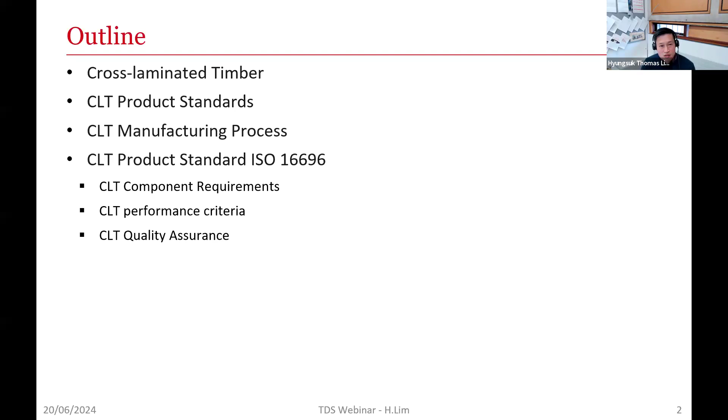So CLT, this is the definition that came from APA, the Engineered Wood Association in the United States. It is a large panel, it's prefabricated. This definition says it consists of several layers of kiln-dried lumber boards stacked in alternating direction, bonded with structural adhesives, and compressed to form a solid straight rectangular panel.

I think that's a bit outdated. I'm sure this definition will be probably updated by APA sooner or later, because today you're going to see that ISO allows the use of non-lumber product. So it's going to be like plywood or wood-based materials pretty much, I mean wood-based panel materials.

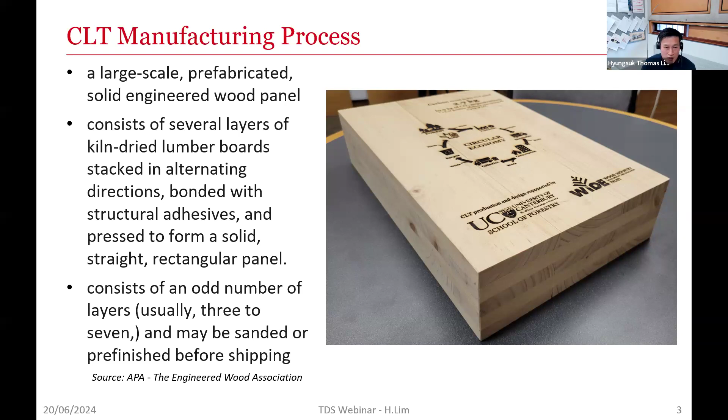So what are the CLT standards out there? Well, ISO 16696 is something some of you guys are familiar with, and ANSI APA PRG 320, that's valid for United States and Canada, but they all say it's a North American standard. And EN 16351, that's a European standard.

And also, even for smaller markets such as Japan and South Korea, they have their own CLT product standard, JAS 3079 and KS F 2081. What do we have in New Zealand? We are not covered specifically by any specific product standard yet. And what about Australia? I believe they are not covered either, but...

So the manufacturers are using ISO 16696 as the overarching product standard, and they're using it in combination with other standards as well. These are not the complete list, but these are the ones being somewhat used the most. ISO, ANSI, and EN are the ones adopted mostly around the world. And you will see why.

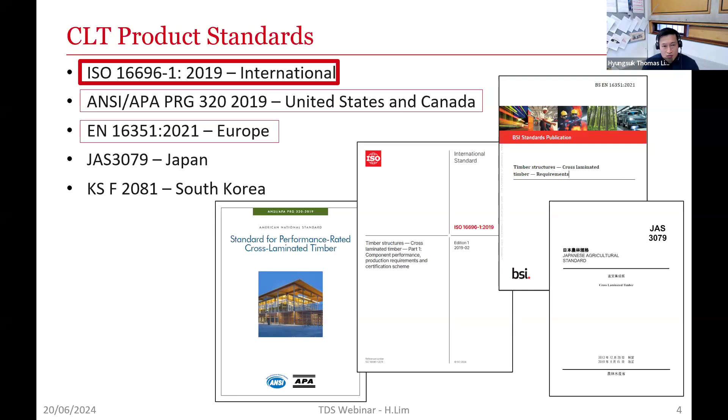Like, let's say, our facility, our manufacturing plant is qualified on ISO 16696. Doesn't that mean our production or our CLT is qualified to be sold in any market? Well, you'll see it's not going to be the case, because it's pretty holistic and very general, but it's not really specific. Okay, so let's start with the CLT manufacturing process.

CLT, this is actually from the CLT handbook. This was first written by FP Innovations in Canada, and they also published a US edition. So you'll see the given condition is lumber, not timber, because in New Zealand we talk about timber, not lumber, right? And it was also made when CLT first entered the North American market.

So you're going to see that they're only discussing how to use dimensional timber, not wood-based panels. Okay, so let's look at the first three processes. One process that's missing is finger jointing here, which I'm going to talk about in a bit. So you can start with the primary lumber selection.

It goes, you have to grade the timber and, say, you confirm, even though you're buying the timber from the sawmill at a grade, you actually grade them again. And then when you buy the timber from sawmill, they are mostly 19%, at least in North America. And you see that when they say kiln dried, it's the average moisture content they're referring to is 19%.

So, but for CLT manufacturing, the recommended MC, moisture content, is 12% plus minus 3%, which means it has to be somewhat redried or conditioned to a lower moisture content when it gets to the CLT manufacturing plant before it gets made up.

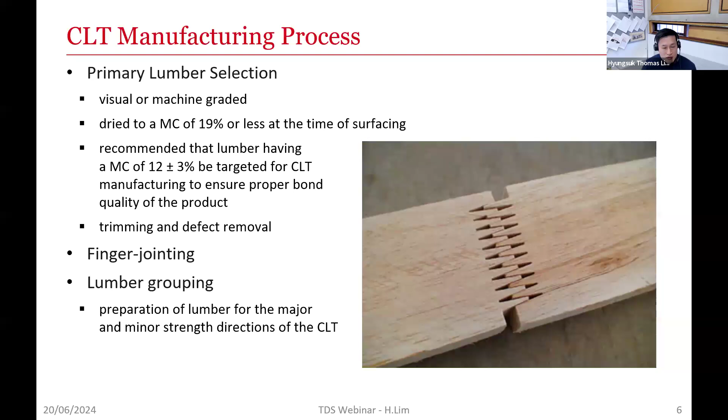Then the lumber gets planed on 4 sides. Why do you have to do that? You have to refresh the wood surface to reduce oxidation for better bonding. The recommended removal is 2.5 millimeters from the thickness and 3.8 millimeters from the width.

So these are the finger jointed timber that's getting planed, and once that's done, they get cut to length, and they go for adhesive application.

Depends on the species, they sometimes put primer too. For example, in the southern United States, they use southern pine as a major species. For that species, if they're using certain glue, they have to go for the primer, which enhances the adhesion between the board and the adhesive system.

The common adhesive types are polyurethane, melamine, and phenolic-based adhesives, along with feed speed. Adhesive applicators and the spread rate are recommended by the manufacturers or the adhesive suppliers. Edge gluing is optional.

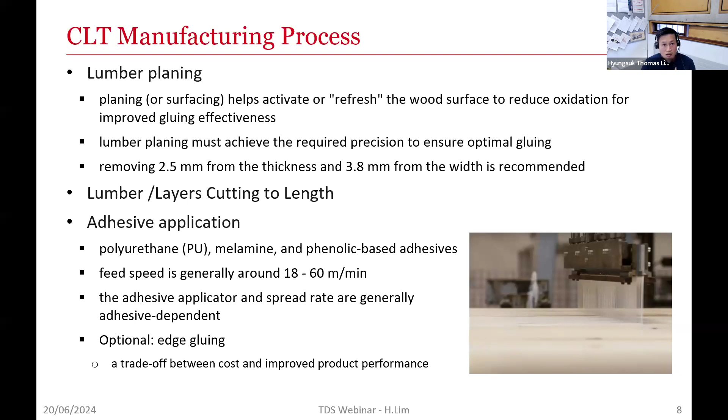So now they're ready, the laminations are ready to be laid up. For today's presentation, I'm going to switch back and forth between the timber and the lamination. Lamination is a piece of timber that goes into CLT. For lay up, adjacent layers are laid up perpendicular to each other.

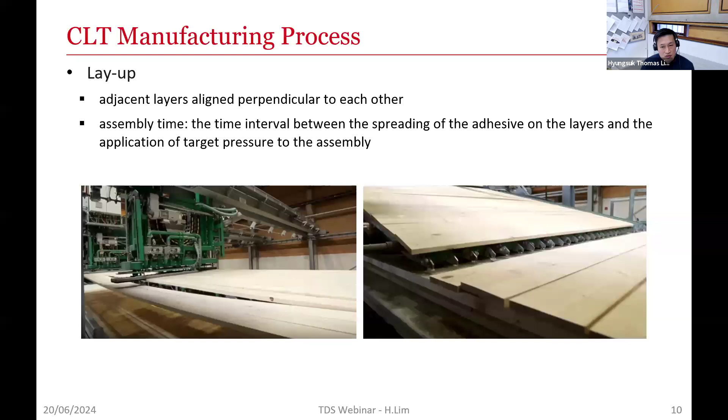You need to consider the assembly time here. Assembly time is the time interval between the spread of the adhesive on the layers and the application of the target pressure to the assembly. But most large-scale manufacturers have automated systems for this, so they can time the lay up consistently and accurately. Now, pressing.

You need to press to consolidate the laminations into the panel, and these are the two main press types. One is the vacuum press that you see on the right, and the other on the left is the hydraulic press or mechanical press.

So what are the advantages of each? Mechanical press actually has much higher capacity for clamping pressure. With the vacuum press on the right, theoretically the clamping pressure is about 0.1 MPa, but if combined with some other clamping system, it can be higher. For the hydraulic press, the clamping pressure capacity can be as high as 1.5 MPa.

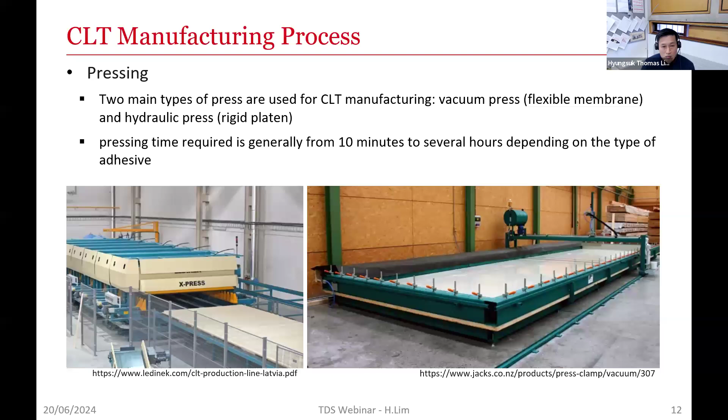An advantage of the vacuum press is that it's a very flexible system. So if the manufacturer is considering making curved CLT or panels with some curvature, this will be a good choice. Another thing to keep in mind is the cost - the hydraulic press is going to be much more expensive compared to the vacuum press.

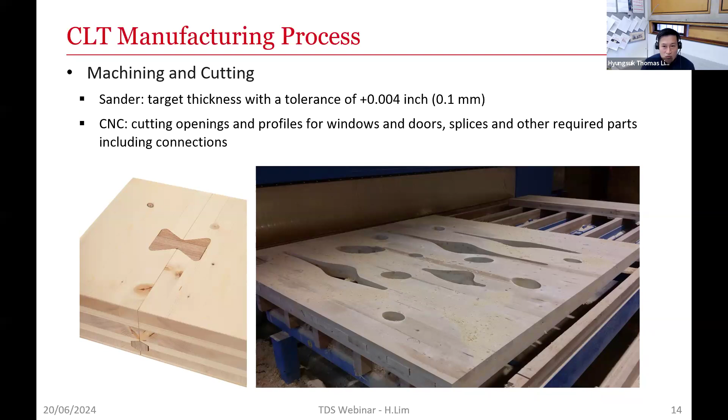Once they're pressed, they go through the last two stages, which is machining, cutting, and packaging. CNC is needed for cutting the openings and the profiles for windows and connections, and so on. Nowadays they implement a sander to control the target thickness very tightly. QC also happens here before it gets packaged up, which I will discuss more later.

Packaging and shipping. Because CLT panels are intended for use under dry service conditions, the panels should be protected from the weather during transportation, storage, and construction on the job site.

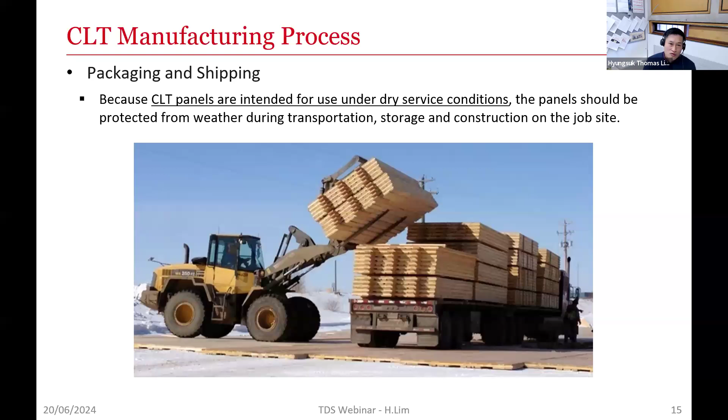So that's pretty much covers the overview of the CLT manufacturing process. Now I'm going to move on to CLT product standards.

Bear with me, I'm very familiar with PRG320 since I actually worked in the United States, but this ISO 16696, I know that Australia's standard committee is reviewing to somewhat adopt this ISO 16696 as the national standard. So I decided to give a talk about this one.

So the aim of the presentation from now on is to introduce what's included in the standard, so you have a brief understanding of how the performance of the CLT is being guaranteed under this standard.

So this ISO 16696 is based on EN, the European CLT standard, and the North American CLT standard - EN 16351 and PRG320. It applies to CLT consisting of at least 3 layers of solid sawn timber or wood-based panels adjoined orthogonal to each other. So now it talks about wood-based panels. They're trying to be flexible with the raw materials, and this is the scope.

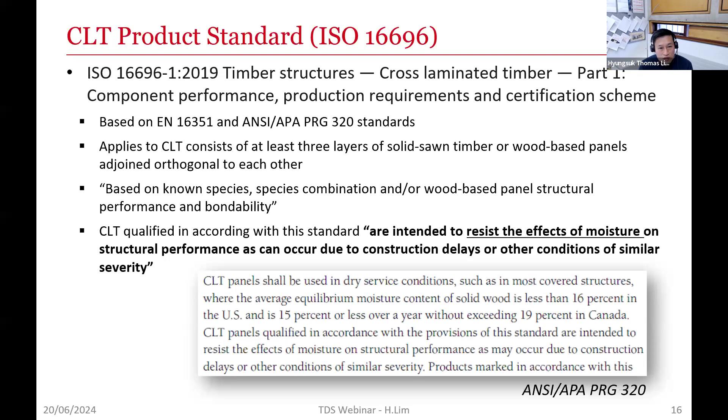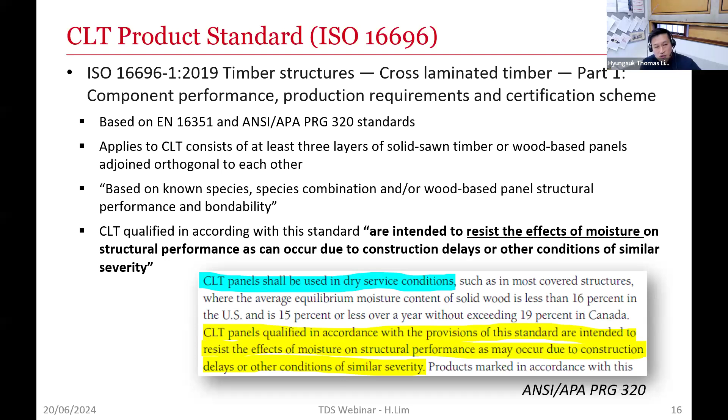It has the same statement, but what's missing is in PRG320 it says clearly that CLT panels shall be used in dry service conditions. So it's not actually talking about use for outdoor conditions.

So we're going to review the component requirements. It's allowing two materials: solid sawn timber and wood-based panel.

For the sawn timber, I get questioned many times about which species can we use. Well, under this standard, it says any species recognized by a national standard is okay as long as the published characteristic density is greater than 300 kg per cubic meter.

And the thickness requirement for this timber has to be greater than 6 millimeters and less than 50 millimeters, which is very general compared to PRG320, which asks for 15 millimeters as the minimum thickness. For the width requirement, it has different width requirements for the major direction and the minor direction.

So for the major direction, it's looking at 1.75 times the thickness, and for the minor direction, it's looking at 3.5 times the thickness of the lamination.

And for the wood-based panels, it refers to the national standard for the product, national standard of the wood-based panel. They're also asking for this national standard for formaldehyde emission as well for the wood-based panels, since they're mostly made with structural adhesives.

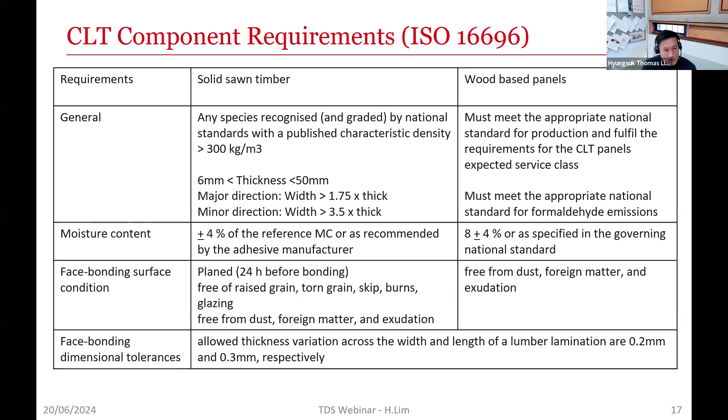There's also this face bonding dimensional tolerance as well. And let's look at what they're asking for the adhesive.

Adhesive requirements can be divided into two parts, basic and additional. Any adhesive used for CLT should meet basic requirements for the intended service class 1, 2, or 3, as shown. But where local building regulations require heat durability testing, then additional requirements should be met, which means creep resistance and shear tests at elevated temperatures are needed.

So for the basic requirements, you just have to do the shear test, delamination test, and the creep resistance test. But if there's heat involved, then you have to do the tests at elevated temperatures.

Finger joints refer to the ISO 10983. And this is something interesting about the ISO standard - glue line integrity for glue line between the layers, face joints. These terms are actually copy and pasted from the standard, so these are not things I made up, which sounds a little bit weird to me.

But it refers to the national standard delamination test. Most of the countries have a glue-lam standard, and most of the CLT delamination test procedure is based on glue-laminated timber delamination testing. So it wouldn't be too difficult to find the national standard delamination test around the world.

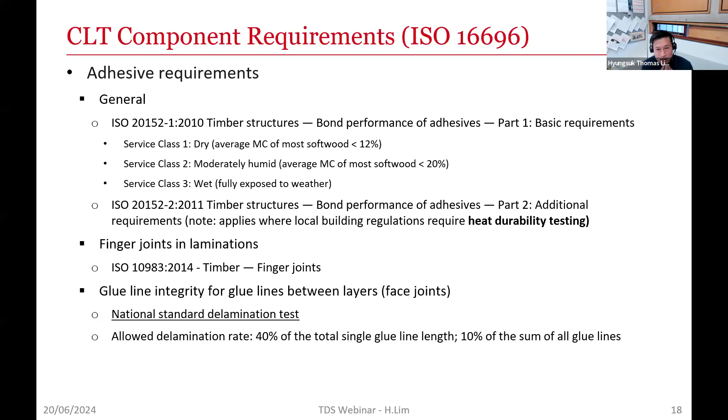So, large finger joints. One interesting thing is they're trying to be comprehensive here, referring to the actual European code, European standard. So it allows these large finger joints of panels - this is the joint between the panels, not the laminations.

As I said, it's following the recommendation of the European standard, and it states the bonding strength is expressed as the characteristic bending strength of the large finger joints.

So how are they being tested? They're tested in this 2-point loading from the top. It looks quite similar to what probably many of you guys are familiar with in this bending test setup - very similar to the full span bending test setup from the European standard. But the only difference is the load span. You see that the load span here is 3H, or 3 times the panel thickness, whereas for the bending strength it's 6 times the panel thickness for the full scale bending test.

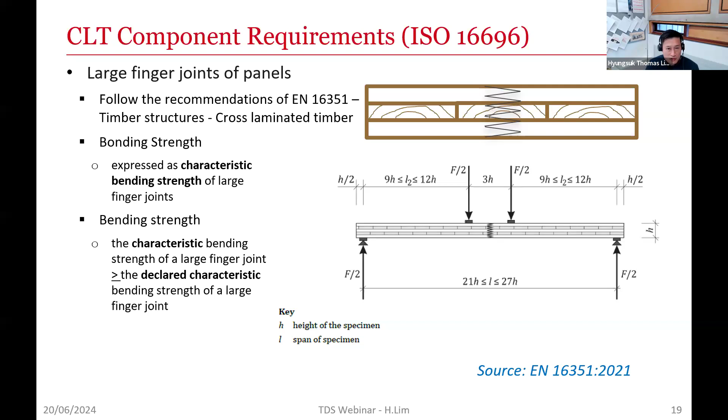So what is the allowable acceptance criteria? The characteristic bending strength of the large finger joint has to be greater than the declared characteristic bending strength of the large finger joint. This is actually not included in PRG320, but only exists in this European standard.

CLT performance criteria for this layup requirement - what is layup? Layup is information about how it's been constructed, how the timber are oriented, which species are used, and the quality of the layers, all of which have to be documented. According to the standard, it has to have at least 3 layers.

And this is something interesting: it says at least 2 solid sawn timber layers should be there. I'll get back to that in a bit. Maximum overall thickness is 500, and total thickness of the wood-based panel layup is allowed up to 50% of the overall thickness of the CLT.

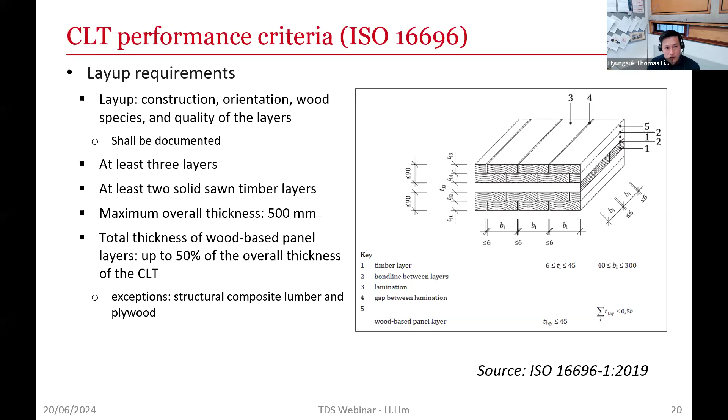And there are exceptions for structural composite lumber and plywood. So let's say you were to make CLT using LVL - let's say you want to produce 3-ply CLT under this ISO using LVL - then you must have the surface layers made out of solid sawn timber, because it's asking for at least 2 solid sawn timber layers for CLT qualified under this ISO standard. Another interesting thing is it also limits how much wood-based panel can be used, but gives exceptions to plywood and structural wood composite lumber, where LVL also applies.

Let's compare with PRG320. This is a lot of text, you don't have to read everything - this presentation will be shared after this webinar, so if you want to look into it you can go through them. This is the latest list of basic CLT grades and layups specified in PRG320.

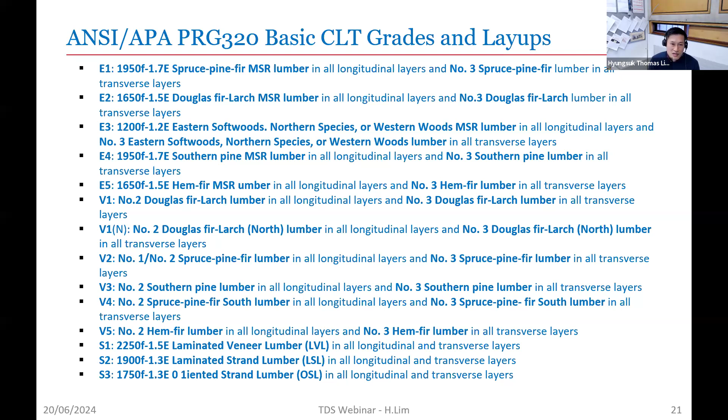It's more standardized, it seems less flexible, but actually if you read PRG320, it allows you to make CLT with any structural composite lumber - you just have to do the testing from your end if the product is not included in their standard.

Let's move on to CLT performance criteria. This is the code from ISO regarding the mechanical properties of CLT products. This standard provides very, very basic information for the testing, and it only covers the basic tests, which is going to be the bending and the shear test.

If you read it here, it says mechanical resistance of CLT products shall be determined by full-scale test or by calculations based on the properties of the layers. But there's no information about what these calculations are. And it says mechanical resistance jointly covers the following essential characteristics: MOE, bending, compressive tension, and shear strength. But there's no test standards referenced for compressive tension, shear - actually it covers the shear bonding strength.

I think it could have more thorough information about what test setups can be implemented, and so on.

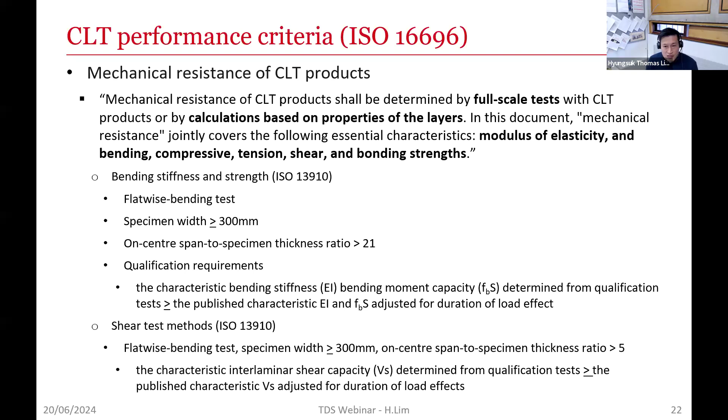Well, this is quite standard, like PRG320 and the European code, asking for the specimen width to be more than 300 millimeters, and a center span to specimen thickness ratio greater than 21 for the bending test, and a ratio of 5 for the shear test. But at least I was wishing it would describe what type of testing they're looking for. They're referring to 2-point bending, where this is the center point bending for the shear test. So certainly there's room for improvement, I think.

Durability - this standard considers three scenarios for bonding performance: solid sawn timber layers without preservative treatment, solid sawn timber layers with preservative treatment, and CLT treated with preservative treatment. So these are the three different scenarios they're looking into.

Okay, so pretty much their philosophy is, if they're made with untreated timber, then the natural durability of that untreated timber should be the durability performance. And if the solid timber was treated and mixed with other ones - I'll get to that in a bit - but if they're treated, it's supposed to satisfy the intended service class, like the CLT and the timber will serve for the same class.

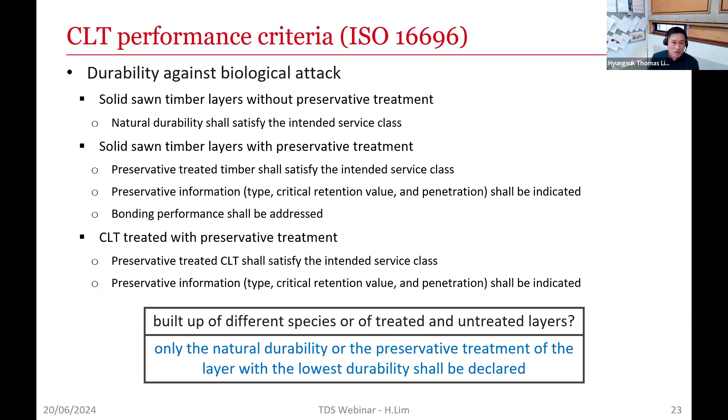I'll give you a schematic chart of what this means, like 3 different ways. So what if the CLT is built up of different species, or of treated and untreated layers? This standard says only the natural durability or the preservative treatment of the layer with the lowest durability shall be declared. I don't know whether this is a fair statement, because if you have 3 layers and the 2 outer layers are preservative treated and the core layer is not treated, you have to claim that the durability of your product comes from the untreated one. So not too sure about that.

Well, what is this? This figure was part of my research grant proposal that I submitted when I was in the United States, working for Mississippi State University. So this explains what it means by making CLT with untreated timber, which is on top, and in the middle, making CLT with treated laminations. And the bottom one is where you actually make the CLT and treat it after, meaning you're treating the CLT product. Is this just some sort of hypothesis or what?

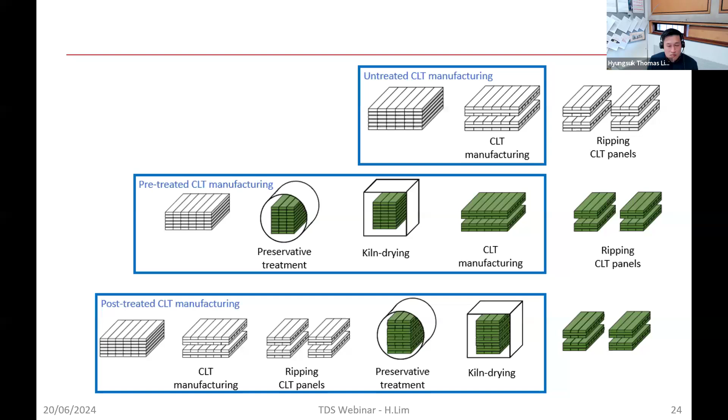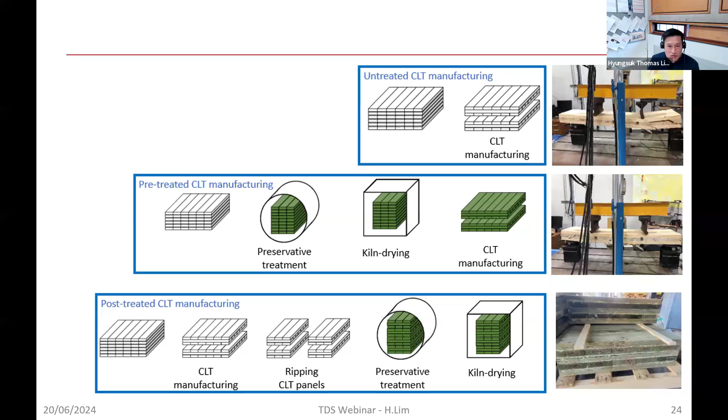Actually, I have done it. So you see these - you cannot really tell which one is preservative treated or not, though the third one here is the preservative treated CLT. This depends on which preservative system you're using - you might not even recognize much difference in color. So in terms of appearance, they look okay. These were at different retention levels - the one you see on the bottom was treated with copper azole, and the middle was treated with micronized copper azole. So that was my previous research.

The standard also asks for documentation of the formaldehyde emission, dimensional stability, and appearance classification. I think the formaldehyde emission and the appearance classification are quite straightforward. Let's talk a little bit about the dimensional stability.

They're quite concerned about this dimensional stability, but let's see how they're measuring it. They measure the reference size, which is the size of the CLT measured at the reference moisture content, around 12% to 13%, at the condition of 20 Celsius and 65% relative humidity. So that's the reference size.

And then there's a corrective size at the actual moisture content - this is the size after the dimensional change. So let's say you're trying to install this CLT in a really humid condition - obviously the corrective size is going to be somewhat bigger, right?

So how do you predict the corrective size? Well, there is something called shrinkage and swelling ratios that's available to be adapted to predict what is going to be the size after being exposed to certain conditions for a certain duration.

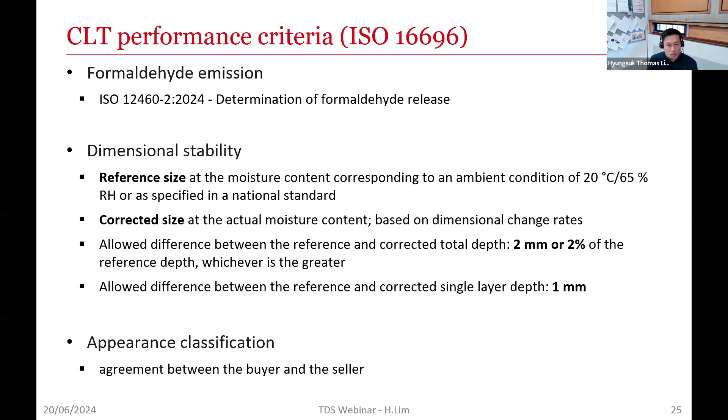The allowed difference between the reference and the corrected total depth is going to be 2 millimeters or 2% of the reference depth. And the allowed difference between the reference and the corrected single layer depth is going to be 1 millimeter. Straightforward. And there is a section in the standard that describes how CLT product assessment shall be done.

First, he talks about the qualification test. When do you do the qualification test? At the beginning of the production of a new or modified CLT product, or at the beginning of a new or modified method of production.

What are the characteristics? It says all characteristics included in this document for which manufacturers declare performance. I think I wish it could be more specific. Here is CLT performance criteria: CLT layups, mechanical resistance, durability, and dimensional stability and appearance. But when I say characteristics, I hope they have more information about these mechanical properties.

It also requires documentation of the test, and also something called declaration of performance. So declaration of performance is a manufacturing specification for CLT products that confirms the product conforms with the standard requirements. And this DOP is used for factory production control, which I'm going to talk about in a bit.

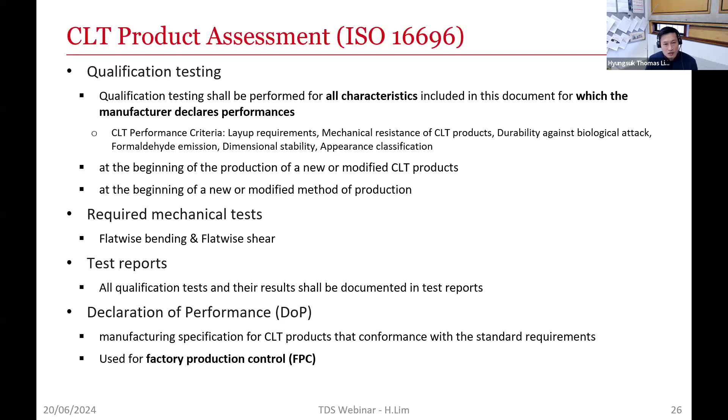So as for quality assurance, this standard refers to something called the Factory Production Control System, FPC. You will find this same term in European standards, which is very, very thorough. If you want to have a deeper look into how this FPC is being implemented for European products, please do so.

So this FPC is a written policy and procedures that ensures the produced CLT conforms to the declared characteristic performance, and it's an ongoing evaluation of the product properties. One thing that's really important to point out is the responsibility of implementing FPC belongs to the manufacturer. They can outsource or subcontract this FPC activity to a third party, but they are not relieved of responsibility for this FPC management. It has to be the manufacturer.

Also, the raw materials and the production conditions of the products shall be traceable. And the production and process quality control activities which guarantee production under controlled conditions shall be documented as well. So it's asking for a lot of documentation.

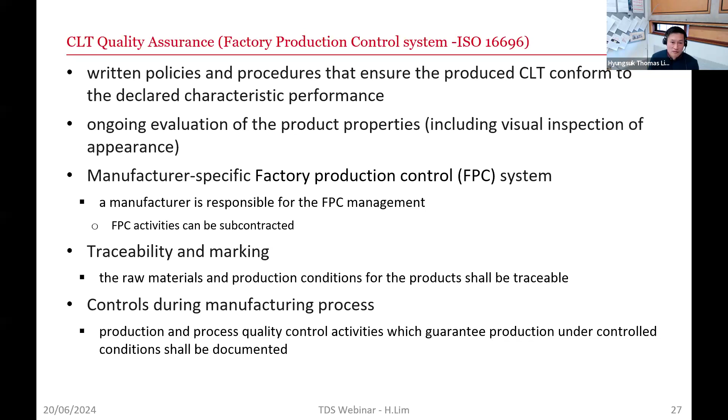And this FPC should have testing and evaluation, and also how non-compliant products will be handled. I think I'm running out of time, so I'll try to be quick here. For non-conforming products, there should be a clear procedure, some sort of action plan for how to eliminate the cause of non-conformity in order to prevent it from occurring again.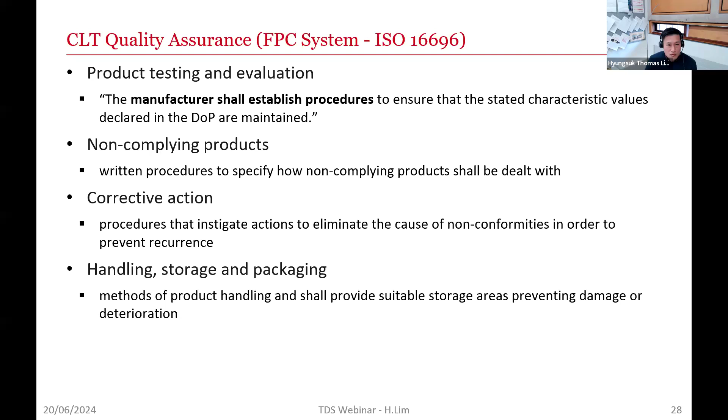Handling, storage and packaging should make sure that damage or deterioration are prevented. This FPC system actually has two schemes in it: one is the initial inspection of the factory and FPC, and the other is how to keep it running all the time, continuous surveillance of FPC.

So when do you do the initial inspection of FPC? That's when you finalize the production process for commercial operation, and obviously the DOP gets reviewed at the same time.

For the continuous surveillance, I don't think surveillance is the correct word. I think it's actually straight from the ISO standard, but it should be continuous monitoring of FPC. So it's asking whether the implementation of the FPC test plans is correctly done, whether periodic maintenance and calibration of the product equipment is done, and review of the test records to make sure that the CLT that's being accredited or qualified under this ISO standard performs as it's supposed to.

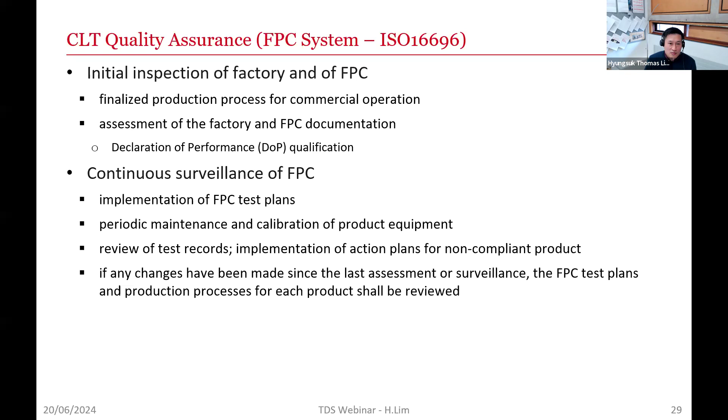And if any change has been made since the last assessment or surveillance, then the FPC test plans and the production processes for each product shall be reviewed again. So in summary, CLT manufacturing process has been standardized. You have seen it, and there are several CLT products.

CLT product standards have been developed even for smaller markets. I went over ISO 16696 - it's an internationally acknowledged CLT standard, and when it comes to specific testing, it refers to the national standards. It has comprehensive CLT component requirements, but for the CLT performance criteria, it's quite basic, and the information about product assessment and quality assurance is quite general as well. That's why a lot of manufacturers, if they don't use ISO 16696 as their core document, combine it with another standard, such as a European standard.

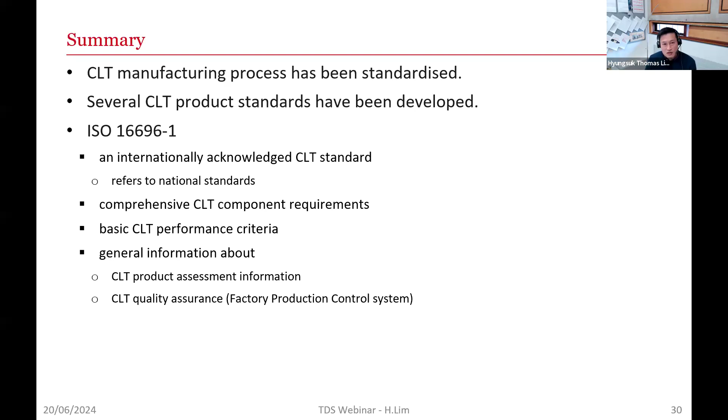So thank you. These are actually CLT samples that my students made during my class, and I'll open up for any questions. Emma?

Thanks very much, Thomas, that was very interesting. We've got a few questions here. The first one being: why do the lamella need to be further dried at the CLT factory to 12% moisture content? What would happen if they used the sawn timber at 18% in their manufacturing?

It doesn't glue up well - I mean, it will glue up, but the variation is going to be more if they use 18%. So they do have a conditioning section in their factory to make sure it goes below 12%. For example, there was a company that wanted to go for preservative treated CLT, and when the preservative treated timber came out from the kiln dry, it came out at an average of 19%, which doesn't mean all the laminations have moisture content below 19%. That actually triggered quite a bit of a bonding problem. So yeah, that's the reason.

And does that depend on the type of glue that's being used as well? We've had a follow-up question saying, I thought some moisture up to 20% helped PUR glues with bonding - does it depend on the type of glue?